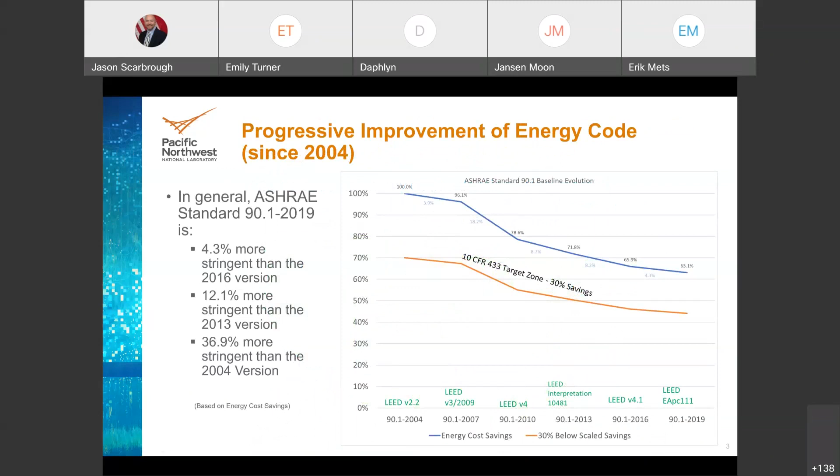Well, all of these performance improvements that we talked about over here, this 18 and 7 and 8%, they came at a cost of complexity. And we started addressing different parts of the code, such as control requirements and occupancy responding issues, sensors, etc. Basically, it's gotten a lot harder in 2019 to prescriptively comply with the code. And even before that, even the 2010 version, the 2013 version.

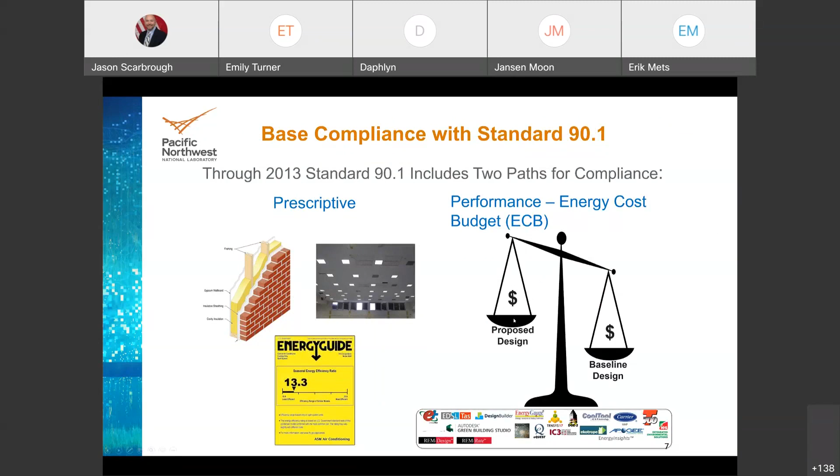So there's also this energy cost budget method. This is a modeling method where you would essentially model your baseline design, model your proposed design, and as long as your proposed design is using less money than your baseline, you comply. But that was not approved for above and beyond. It's these beyond code programs that really became the problem. And that is our goal in the federal government, is to go 30% beyond the code. And so that's where Appendix G and the performance rating method comes into play.

So it's similar to ECB. You're still doing an energy model, but it's more flexible. It wasn't for code compliance prior to 2016. It was used for LEED, these different ASHRAE standards. This is where you have your trade-offs. Traditionally, you would only use this rating method if you needed trade-offs, right? You couldn't meet the code prescriptively because your client wanted only single pane windows or something like that. I don't know what it may be.

But you wouldn't comply with that prescriptively. But if you had a really, really good boiler, you could potentially make up for those single pane windows. And the performance rating method allowed for you to do that. But it did involve a more complicated modeling process. So, there were give and takes to all of it. But each program had different rules.

And then it comes down to what we in the codes program call AHJs, which is the authority having jurisdiction, who can say what you can do or what you can't do. But it is confusing, expensive, difficult to master, not so many software solutions, etc. So what codes has been working towards is getting rid of this complexity, streamlining things, and making it all a little bit easier to work with different masters, if you will.

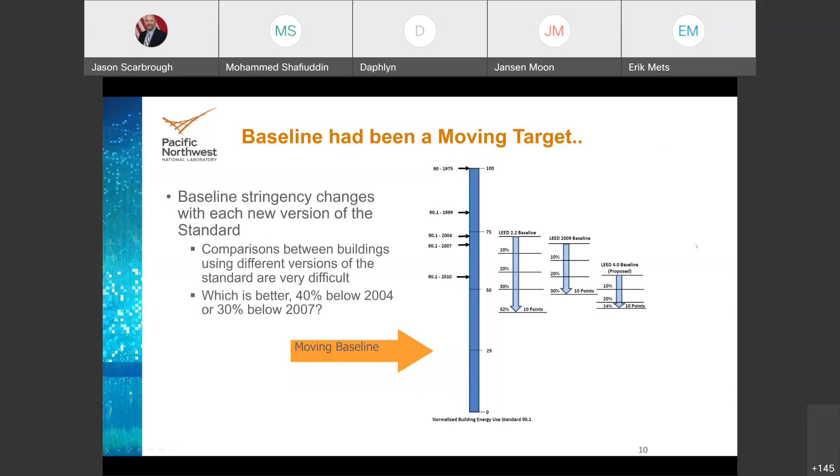So again, this is just another figure of our moving target here. The stringency changed. We have LEED on here kind of as our baseline, but the new versions kind of made it so my design might comply with LEED 2009, but not V4, and what is better, 40% below 2004 or 30% below 2007? It's probably pretty close to the same, but the only way to really know is to get in there and change your energy model and adapt it. So it is a problem that we are intending to solve with this. Sorry, my slides are a little bit slow.

All right, so through 2013 for compliance, and again, compliance is different than beyond code, and it's something that I just don't think is stressed enough in these sort of trainings. There are two different paths, one for basic compliance, which is you comply with 90.1, and the second one for going above and beyond. I'm going to keep saying that because it matters. Appendix G is independent, which is a really great thing moving forward, whereas the ECB baseline is dependent on the proposed design. You may hear that the new baseline that has come out is a stable independent baseline, meaning it doesn't matter so much what the systems are in your building, the baseline is going to remain the same no matter what.

All right, so fixed baseline. This is the big thing of what we're talking about here. So fixing the baseline so that we really only have to do one baseline model and hopefully only one proposed model. This was introduced beginning in 90.1 2016.

And the point is one rule set for many purposes. If you have multiple things that you need to be doing, federal tax incentives, energy code compliance, LEED, all of this can just use the same model, if you will.

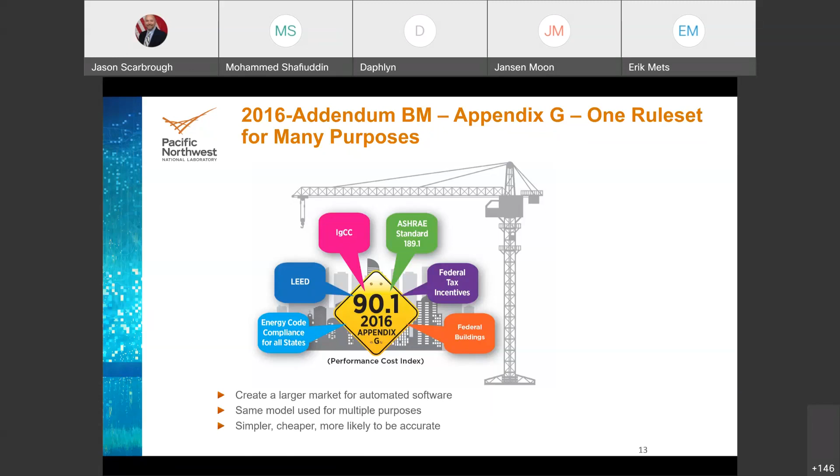Moving on, fixed baseline. So this is what we're talking about. This is the actual code reference in ASHRAE 90.1, 4.2.1.1. New buildings shall comply with either the provisions of sections 5 through 10. That's like your COMcheck or your REScheck. You're just ticking all the boxes, which now has a whole bunch of control requirements that are quite tricky for HVAC. Section 11, the energy cost budget method, that is your dependent baseline that requires energy modeling, meaning your baseline systems change based on the selection of your proposed systems.

And now you have Appendix G, performance rating method, which can formally be used for base code compliance in addition to above and beyond. That is a technical inclusion, but an important one at that, meaning that for whatever reason, if you are trying to or need to demonstrate just base compliance with the code, you can do it using Appendix G now. You do not have to do any other sort of REScheck or COMcheck or anything like that.

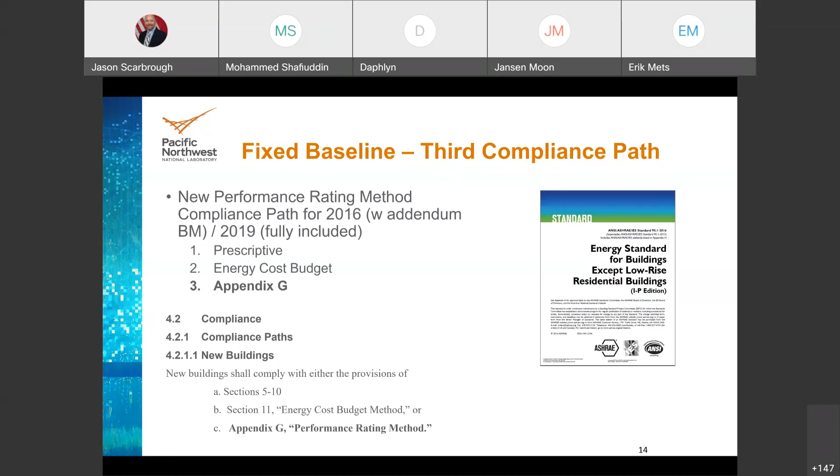All right, so our fixed baseline. Good news, the baseline is now back to 2004. Woohoo! It's going to be easier, right? Well, not exactly. They still are setting performance targets for the different codes. You just have to be a certain amount better than those codes.

So for 2010, you were like 26% better. For 2016, a little bit better. 2019, et cetera. You keep going down, but that baseline stays the same. And what they call this is the PCI, Performance Cost Index.

So this basically is the proposed building performance over the baseline building performance. A PCI of 1 would be a building that only complies with ASHRAE 90.1 2004. A PCI of 0.5 would be 50% better than 2004. A PCI of 0 would be net 0.

So this is changing with each version of the code, but the great thing about it is you can use the same modeling to demonstrate compliance. So if you have a state that's giving you trouble and calling you out and saying your buildings aren't very good, you can use your same building, your same PCI to say, actually, we are meeting your ASHRAE 90.1 2010 code because we're meeting 2019 or whatever that may be.

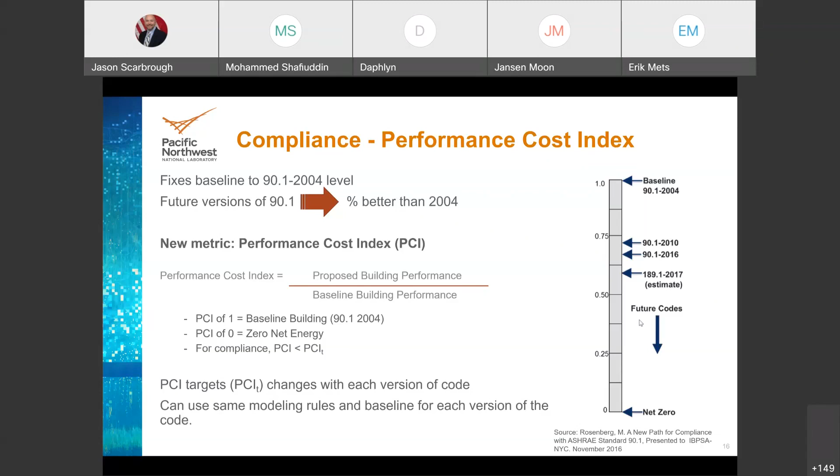And this will continue, the PCI target will continue to go down for each version of the code subsequently. 2022 will be lower than 2019. 2025 beyond that will be even lower. So for compliance, your PCI needs to be less than your performance cost index target. And that target, we say it's 1, but there's a little bit more to it than that. That's the simplest case where you have a building without any mixed use types and all that sort of stuff. We do have some more detailed calculations there.

So essentially, your target is your baseline building unregulated energy consumption, and I will get into this on the next slide, plus your building performance factor times your baseline building regulated energy consumption, all over your baseline building performance. So essentially what this says is we are taking out unregulated energies. Yes, this is our plug loads, our process loads, etc. And we are acting our performance factor on our regulated energy consumption. This is our HVAC efficiencies. It's essentially what's covered in the 90.1 chapters 5 through 10, our envelope, our lighting, our ventilation, etc., is all covered in the regulated energy consumption.

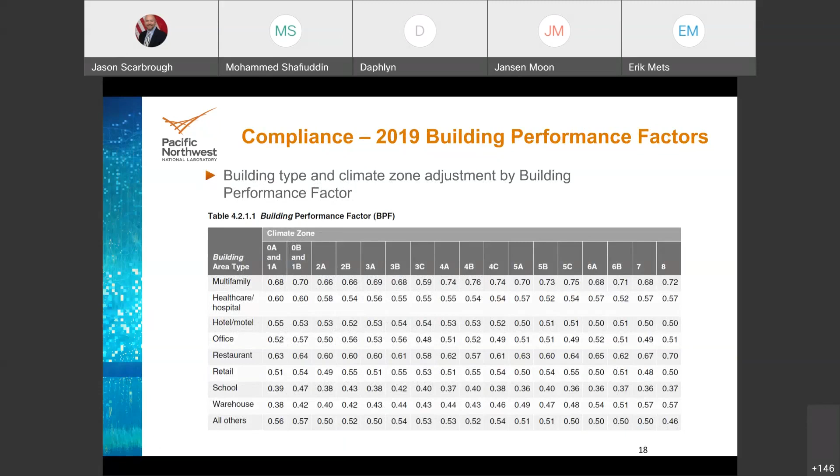All right, how does 30% improvement play into the BPFs and PCI targets? Very good question. So in theory, the PCI target would be lowered by 30%. Technically, there is a little bit more to it than that. And really the building performance factors are what should be lowered in that manner. But Daniel, that is a very good question. There is going to be additional guidance on that, but for the most part, what you're doing is just saying, okay, my actual performance cost index, my PCI, is less than my performance cost target by that 30% value.

Modified BPFs, yeah. You can get into modified BPFs, but LEED, for instance, and we'll get into this, just goes into improving the overall performance cost index. They don't get into modifying the actual performance factors.

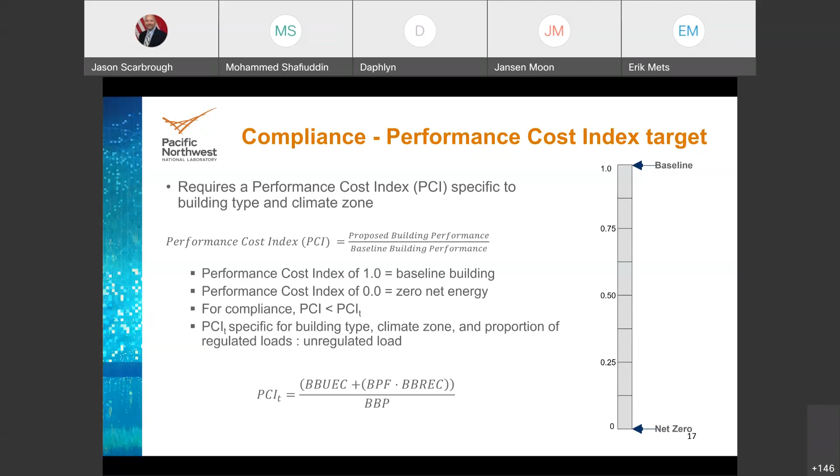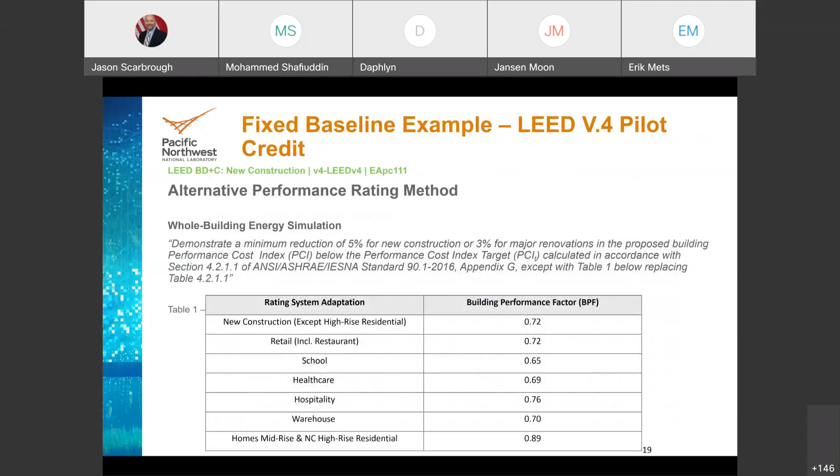So this is what LEED does. Now, this is a little bit different than what we've been talking about before. So this is our LEED pilot credit. This is LEED pilot credit 111. This is for LEED version 4, which is the current governing version of LEED. Some of you may have some 2009 legacy projects out there that are different, but for the most part, this is what people will be using.

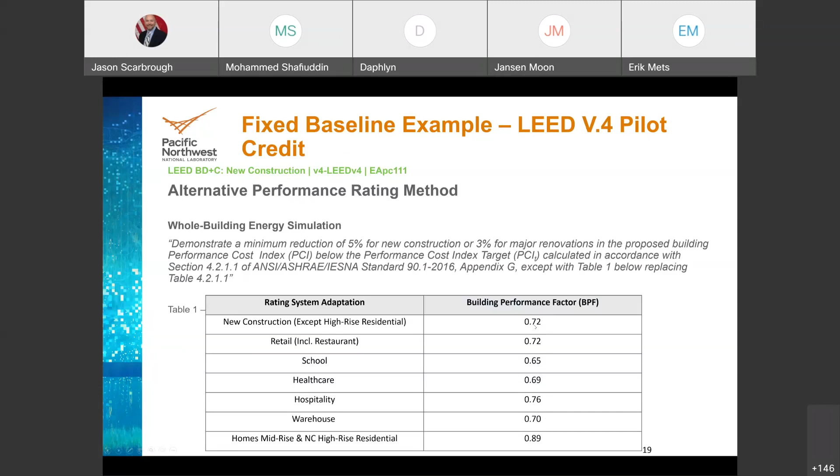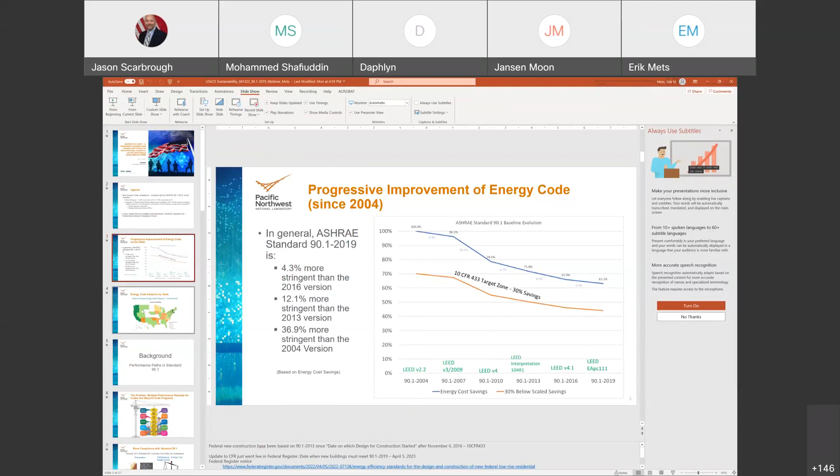And they've basically adopted the fixed baseline. And what they did is they created their own building performance factors here. And the reason why, and I may escape out of the presentation mode just to switch back and forth a little more quickly here, is this improvement. LEED v4 is based on 90.1 2010, right? So, you have to be 5% better than 90.1 2010, and then you get all sorts of lovely points going above and beyond that. But the performance factors weren't really published.

This one is for 2019. There's a similar table for 2016, but LEED has essentially created their own building performance factors for 2010 because codes never did that because this didn't exist for 2010. So that may be something that they adopt in the future if there is a demonstrated need for it. But it would have to be all of the states up here that are still using 2010 or 2007 as their baseline to say, hey, we need BPFs for that, which isn't super likely. So we are getting here.

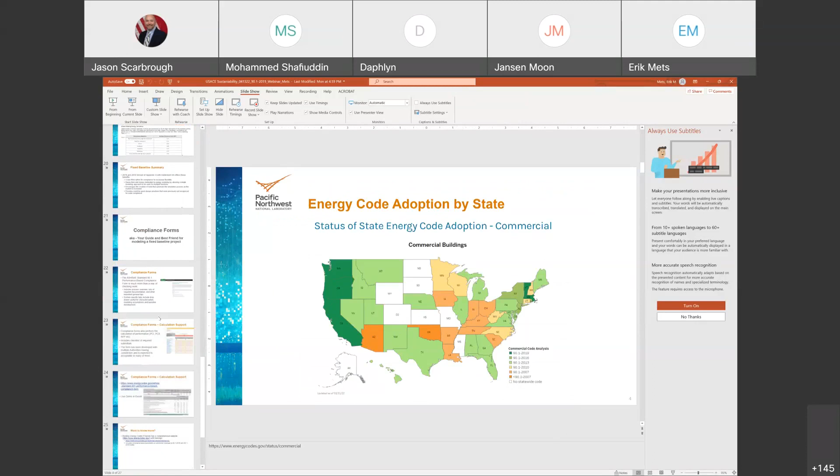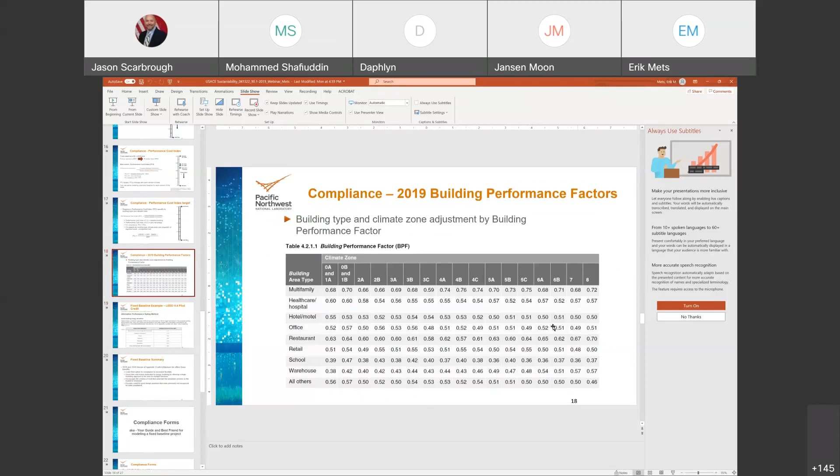So LEED created their own building performance factors, and interestingly enough, LEED did not even go so far as to have different climate zones, and they don't have all the same building types. But you can see here the building performance factor for new construction is 0.72 for LEED, whereas for 2019, if you did an office, it varies from 0.49 to 0.51. So going back to this, your performance cost index target for 2019 would have the lower factor here for BPF, that's your 0.5, but for LEED, it would be higher because your BPF is 0.72.

So when you go and do your cost savings for showing that your actual performance cost index is less than your target, you would have a higher target for LEED based on their 2010 baseline and a lower target for 90.1 2019 compliance. Either way, you would have to be there, but you would have a larger gap based on the higher BPF. Let's see.

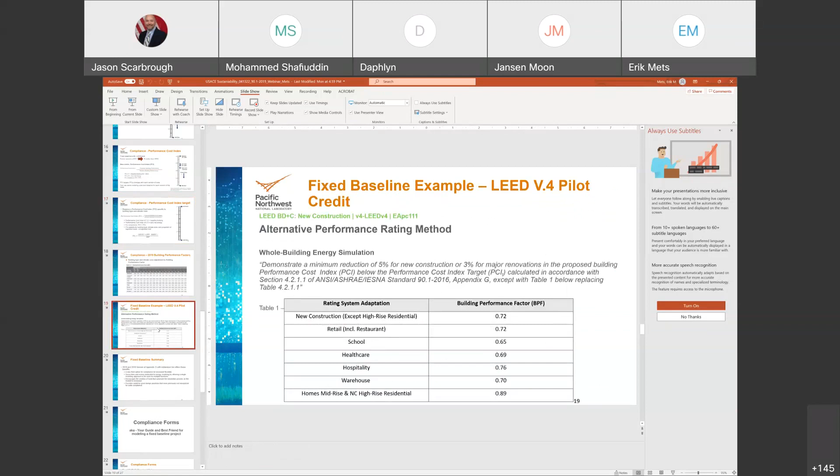Okay. So summary. The 2019 and 2016 version of Appendix G with Addendum BM offers the benefits. Again, it's only in 2019 and 2016 that this started. Third option for compliance, which is nice. You don't have to do any other modeling or anything to show just base compliance if you had to do that. You're dedicating your energy modeling to a single approach as opposed to multiple functions. So hopefully they can improve that accuracy. The nice thing is the creation of tools that automate the simulation process as the market is increased. This already exists for some tools, for some baselines. It's essentially automating the baseline process.

This is expected to get much better in the near future in terms of you will be able to go into a modeling software and enter the details of your building. This is mostly use types, sizes, climate zones, etc. and it will be able to generate automatically the baseline building for you. And then you can play with it and do your proposed design on top of it, and it should make for earlier and better adoption of the modeling in the process, so that we're not having, oh, an error in the model at the last minute once it was reviewed and our savings changed and all that sort of good stuff. So that is a nice improvement.

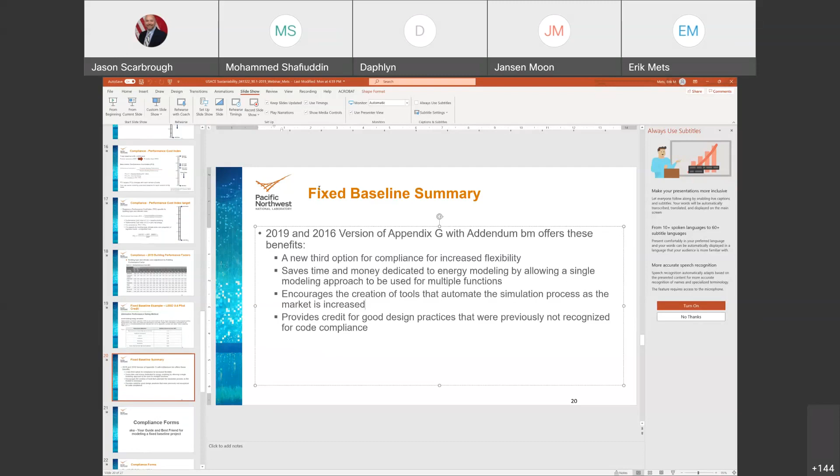All right, let's see. Go back here. So the compliance forms. I hate that they're called this, but that is their basic use. But for me, the best way to use these is more as a guide and a reference point for modeling a fixed baseline project. These are new as of, like I said, about a year and a half ago. They have process overview lists, a lot of good stuff that the modelers can use while developing the model.

And I really do like them, not only from the reviewer's standpoint, but from the developer's standpoint. The nice thing is they do this calculation for you, your PCI, your PCI target, and your building performance factor, because again, it's a little bit of a trickier calculation. You're not going to be doing it back of the envelope quite so much anymore. But if you have your information in the form, it can calculate all that for you and kind of takes that pressure off. There's a checklist for required submittals.

It is anticipated to be acceptable by multiple AHJs, including USGBC or GBCI, in this case the Green Building Certification Institute for LEED. I have not firsthand verified that GBCI will be accepting these, but I don't actively work on many projects anymore. But again, the intent is that the state, the feds, the third-party programs will all accept the same form, so that you don't have to put all the information in multiple different places.

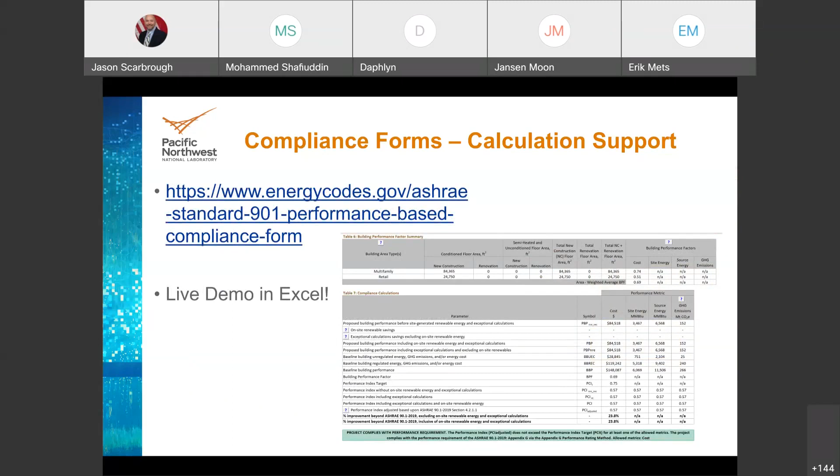So that is more or less the extent of the presentation. We have 18 minutes left here. So I was going to take you guys on a quick tour of the Energy Codes website, which is new, and poke around in the Excel file as well to kind of show you a lot of the helpful little things that it does.

So let's see, if we're talking about guiding principles, again, this is really a part of all of these. Whether you're doing LEED or guiding principles or anything, you're most likely always going to have some sort of energy performance requirement. And this 90.1 fixed baseline should be helping you no matter what master you are serving. That's the whole point. So yeah, it's going to be a good thing no matter what.

It's an exciting new frontier in the land of energy modeling, and I think a lot of people are actually somewhat anticipating using the newer codes, not because it will necessarily be easier. Again, performance is still harder, but the actual documentation should be a little bit easier.

So I am going to stop sharing, and I'm going to change it up a little bit and do my screen. Right. Let me know if you are having any problems.

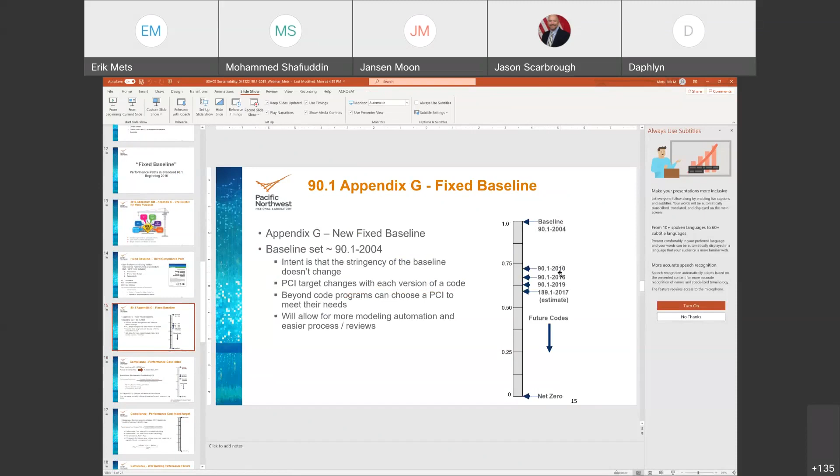So when we go back and apply it to our slides, this is what we're talking about here. The performance cost index is this sliding scale, remember, 1 being what a 2004 building would perform at. For 2019, we didn't put specific numbers here because the PCI target depends on what your building is, but for this case, the PCI target is 0.75. So a 25% improvement over ASHRAE 90.1 2004 would demonstrate base compliance with ASHRAE 90.1 2019. And what we are actually achieving, our PCI, is 0.57. So 0.57 is less than 0.75. We comply, and it is 23.8.

So do I understand correctly that PCI is based on cost? Yes, it is based on cost. Cost is what ASHRAE uses in 90.1 Appendix G. It is based on energy cost. It is up to an authority having jurisdiction to base it on something other than cost, whether that be site energy, source energy, greenhouse gas, etc. But if you are going to base it on anything but cost, you would actually have to change your building performance factors to demonstrate the code equivalencies.

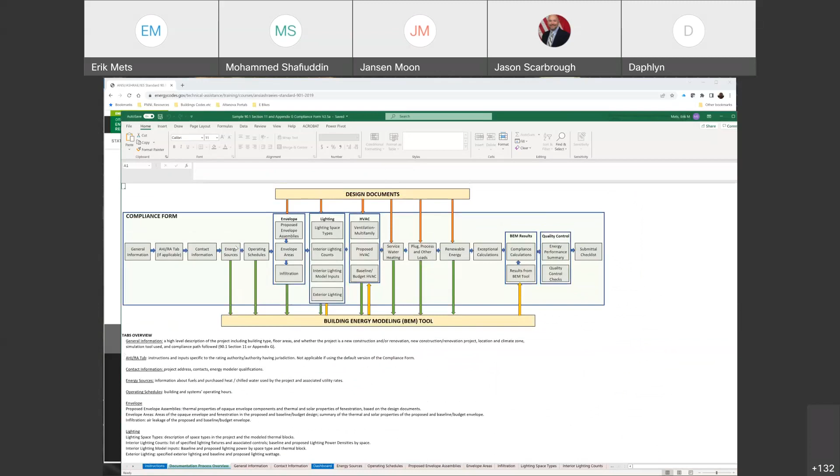Instructions, always good to read. Documentation process overview. This is just a proposed flow chart, if you will. General information, this is where you start kind of putting in the stuff that matters. So this is one of the more important ones. This is where you are selecting your version of 90.1. It only exists for 16, addendum BM, and 19 because that's all it worked for so far. But you can actually change it for your minimum code compliance and above whatever.

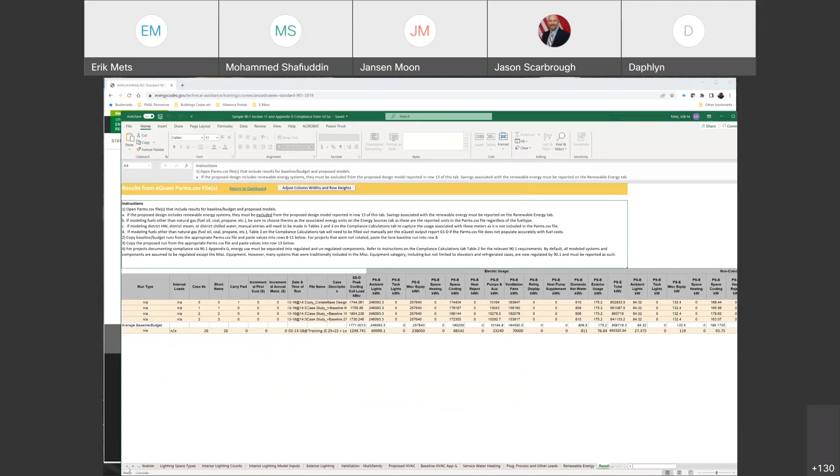What it's based on, the simulation program, this is a nice little feature here. We have eQuest selected because you can actually copy paste your modeling results directly from eQuest. This is from your parametric analysis parms.csv file. You can literally copy paste it right in here, and it will then pre-populate all of the numbers. It also does that for EnergyPlus, and it has lots of different options here for the inputs of your modeling results, if you will, whether it's Trane or eQuest or whatever.

That does end up sort of changing your results tab here to what you're putting in. And some of them are easy copy paste, some of them are not so much, but again, it is designed to take that information. But the sample form, which again, when you download this, it comes with a sample form and a blank form. It's always good to kind of poke around the sample form that does have eQuest results in it. So put in your breakdowns here. This is the most important thing.

But then you can put in your energy sources, and this has your rates. Again, there's demand, and here, this other sort of rates as well. Here we said we based it on actual rates, but EIA is also an option there you can sort of play with. Schedules, have it all in one place, your envelope assemblies. And the really nice thing about this is, you can put this information in and it kind of walks you through everything that you have to do.